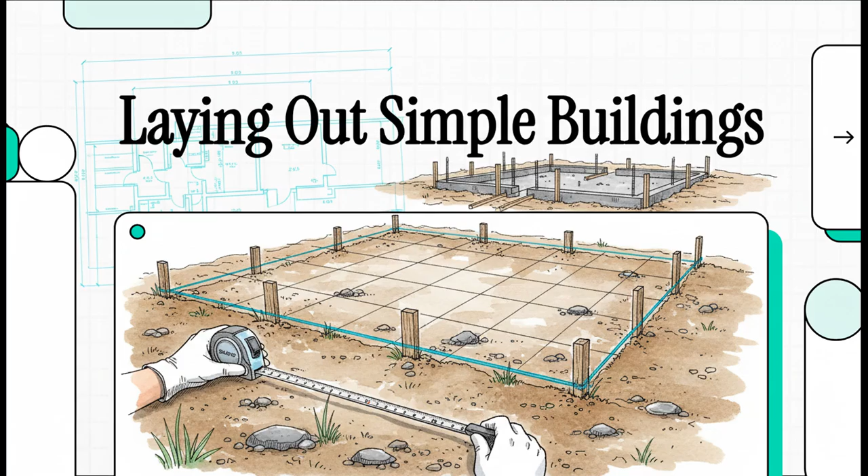Okay, so let's really get into this. The big question is right here. How do you take all those perfect lines and angles from a flat plan and transfer them onto the real world, onto uneven ground, with total accuracy? Because if you get this wrong, the whole project is in trouble right from the very start.

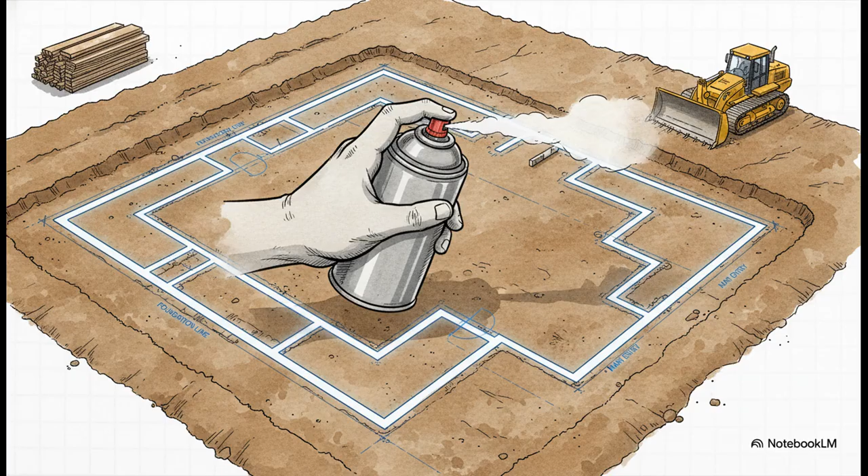And the answer is a process called laying out. It's actually a beautifully simple concept. Before any concrete gets poured, before a single brick is laid, you're basically drawing a full-scale version of the building's footprint directly onto the earth. This is the foundation of, well, the foundation.

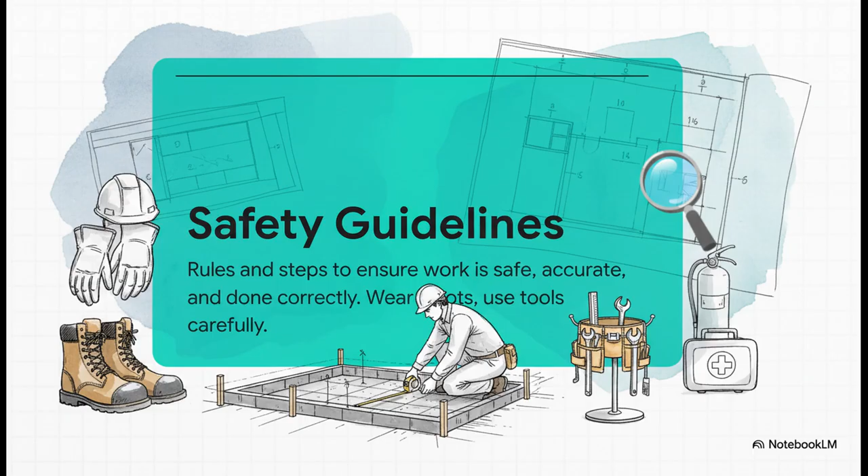But wait, before we even think about picking up a tape measure, there are two golden rules. These are the absolute bedrock of the entire construction process. You gotta get these right first. The first rule, and it's always number one, is safety. Now, this is about more than just avoiding accidents. A safe site is an organized site. Wearing the right gear, using your tools the right way, and keeping the area clear, all that stuff makes sure the work can be done accurately without any dangerous distractions.

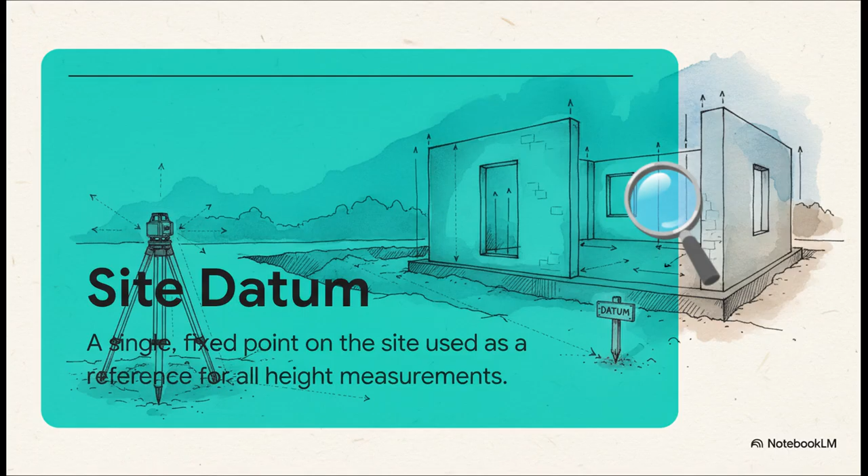The second golden rule is all about establishing the site datum. Think of this as a single immovable point on the site that becomes the master reference for every single height measurement. Every floor, every window, every doorway, its height is all calculated from this one starting point.

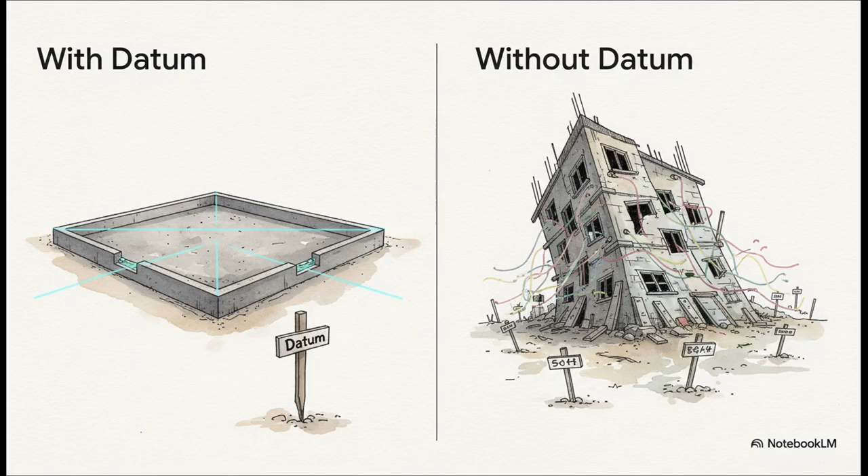And why is this so critical? Well, without that one fixed datum point, you'd be measuring from a bunch of different spots. And the result? It would just be a cascade of errors, leading to the ultimate disaster. A building that's uneven, or even worse, sloping. No one wants that. All right, with our golden rules locked in, it's time for the action, measuring and squaring. This is where we take that blueprint to the ground and make sure every single corner is absolutely perfect.

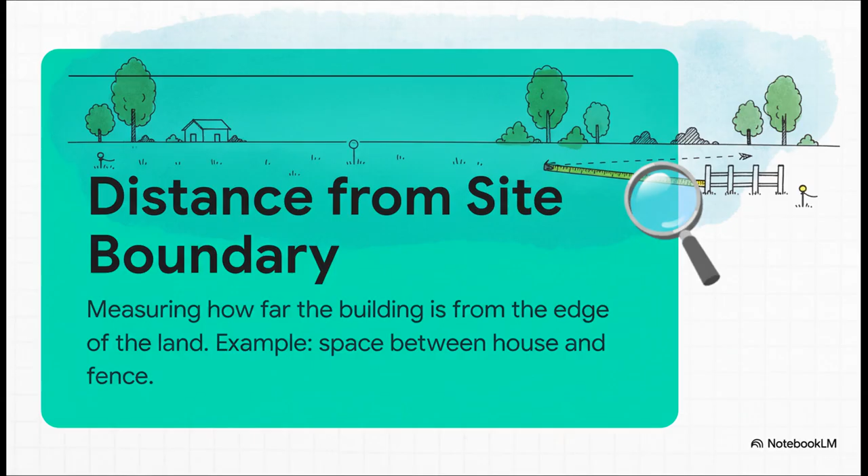Now, the very first measurement you take isn't actually for the building itself, it's for its location. You have to measure the distance from the site boundary, the edge of the property. This step decides exactly where on the plot of land this new structure is going to sit. And why is this so important? Well, there are two huge reasons: laws and neighbors. Every town has rules about how far a building has to be from the property line. Get it wrong, and you're looking at big fines. And of course, you really, really don't want to accidentally start building on your neighbor's property. That's a mistake you just can't make.

Okay, now for a bit of builder's magic that's literally been used for thousands of years, the 3-4-5 rule. It is such a simple, brilliant way to create a perfect 90-degree corner. You just measure 3 units down one side, 4 units down the other, and if the diagonal line between those 2 points is exactly 5 units, bam, you've got a perfect square corner. It's just a super practical way to use the Pythagorean theorem, and builders have relied on it forever.

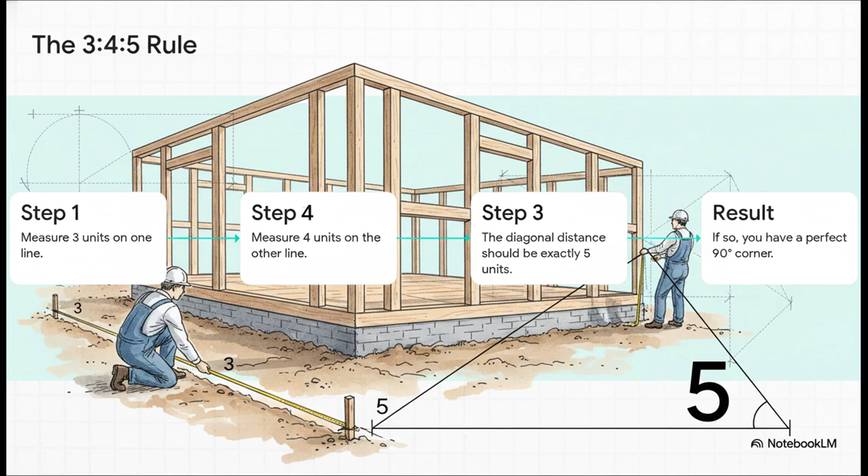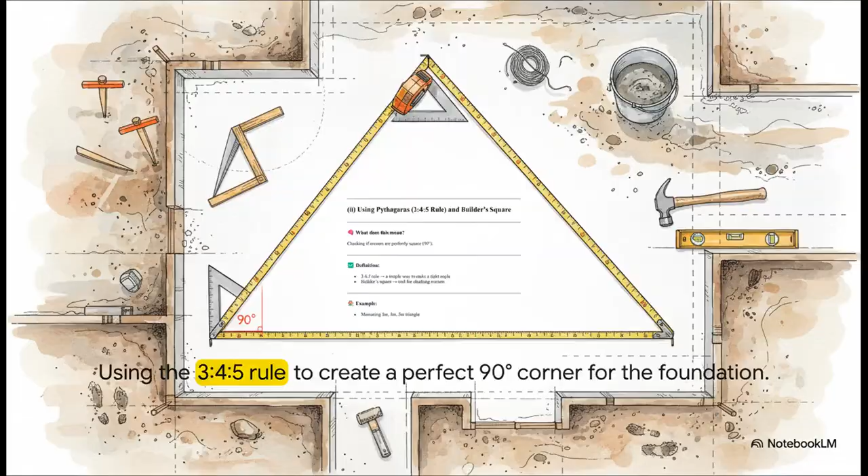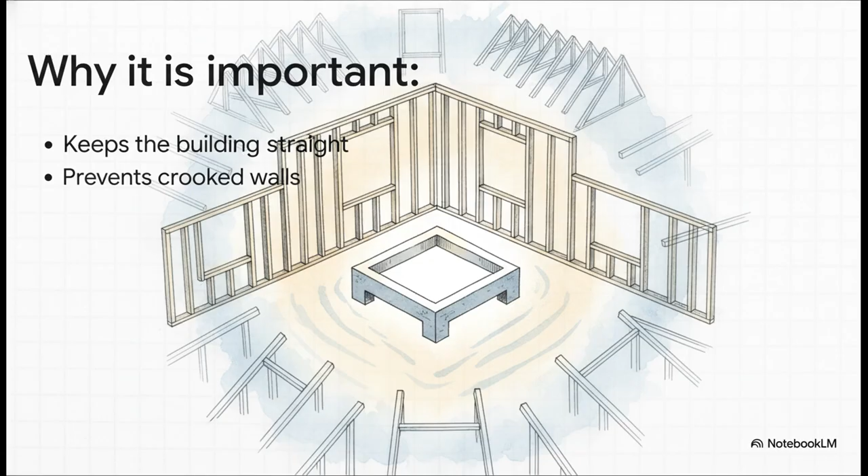And here's what it looks like in the real world. Just 3 simple measurements with a tape measure, and you get that perfect triangle. This incredibly simple check guarantees that the cornerstone of the whole building is absolutely precise. So here's the bottom line. That one perfectly square corner sets the standard for the entire build. If your corners are right, your walls are going to be straight, your rooms will be square, and everything that comes next, from the floors to the roof, is going to fit exactly like it's supposed to.

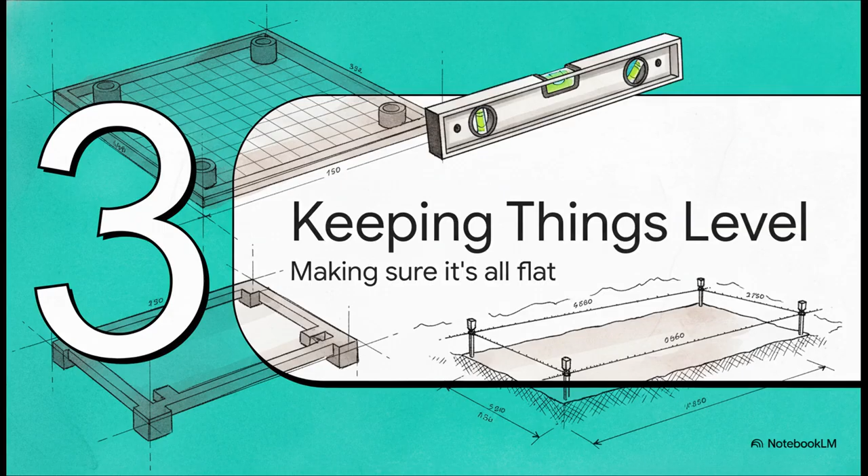Okay, so we've got the building's 2D footprint sorted out on the ground. Now we've got to conquer the third dimension, making sure everything is perfectly horizontal or level. And to do that, we have some awesome tools. You've got your classic spirit level, which is great for small jobs. Then there's the aqua level, which cleverly uses the fact that water always finds its own level, perfect for longer distances with simple tech. And then you have the modern solution, the laser level.

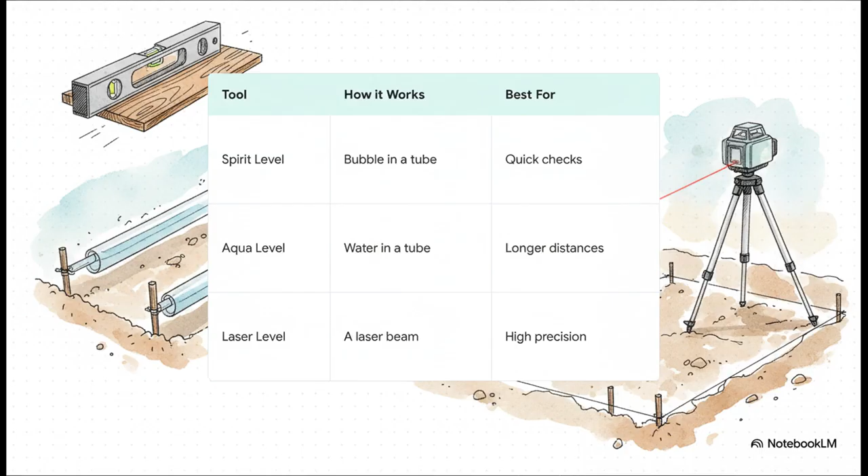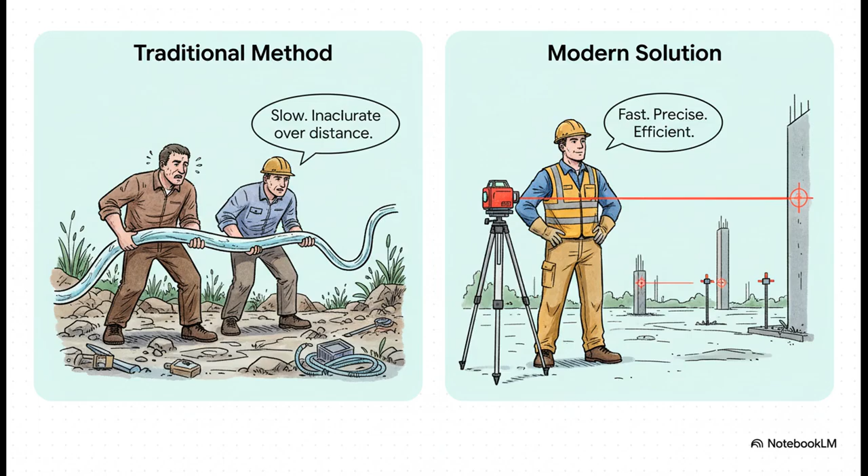Honestly, the laser level is a total game changer. It shoots a perfectly level beam of light over really long distances, which means one person can work with incredible speed and accuracy. It is a huge leap forward in both efficiency and precision compared to the old school methods.

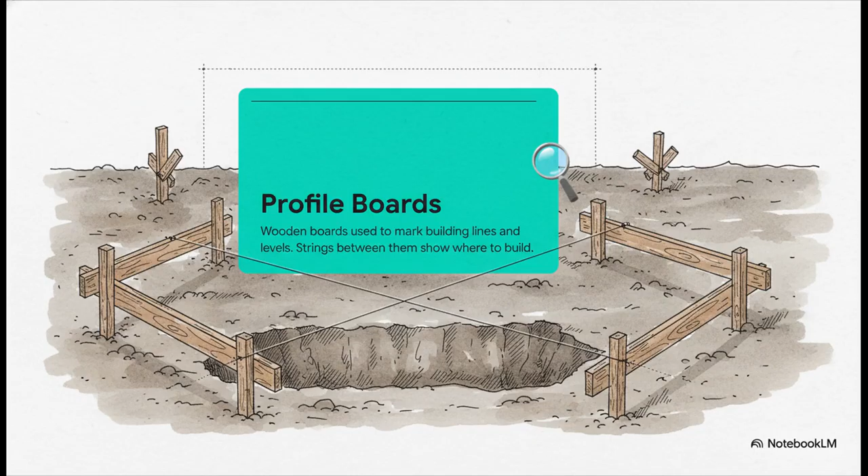Okay, we've measured, we've squared, and we've leveled. Now it's time for the final layout step, marking the final lines. This is where we create the actual guides that the entire construction crew is going to follow. And to do this, we use something called profile boards. They're just simple wooden boards set up just outside the building's footprint. Then, strings are stretched super tightly between them, hovering directly over where the foundation trenches and the walls need to go.

These strings, they are the ultimate guide. They show the excavator exactly where to dig. They show the masons exactly where to build the walls. It's a clear, physical line that takes all the guesswork out of the equation and prevents some incredibly expensive mistakes during the priciest parts of the build.

And all of this brings us right to the foundation of success. Every single careful step we've just talked about, from that first safety check to the final string line, is what guarantees a building starts right and, more importantly, ends right. And to help you remember the whole process, here's a great little tip from this source material. Just think SDMLP. So that's safety first, then establish your datum, then do your measuring and squaring, check your levels, and finally set up your profiles. SDMLP.

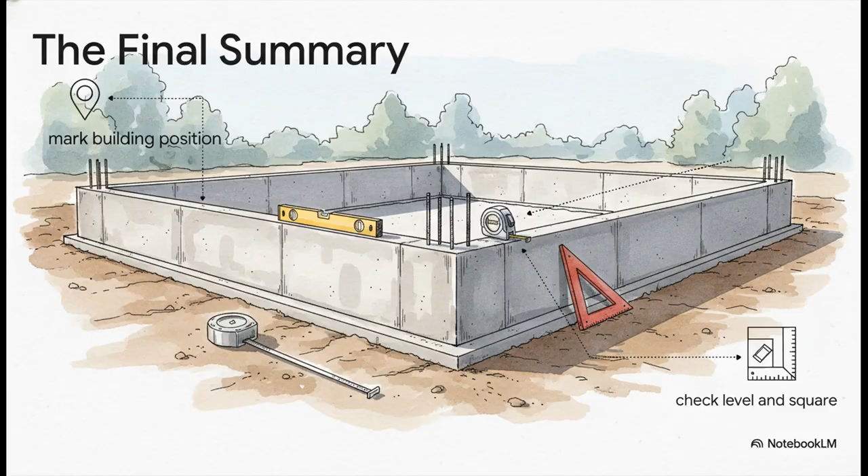So let's just quickly recap the core skills here. It's all about marking the building's exact position, measuring correctly from the boundaries, and using those simple but powerful techniques to make sure every corner is perfectly level and perfectly square. And really, it all boils down to this one simple sentence. The entire point of laying out is to make sure the building is straight, level, and in exactly the right place. It's the very first and maybe the most important promise of quality in the entire construction project.

And that kind of leaves us with a final thought, doesn't it? This whole layout process is the absolute pass-fail test for an entire building. Getting these first, tiny details right determines all the success that comes after. It really makes you wonder, what other seemingly small details out there in the world have such massive, massive consequences?